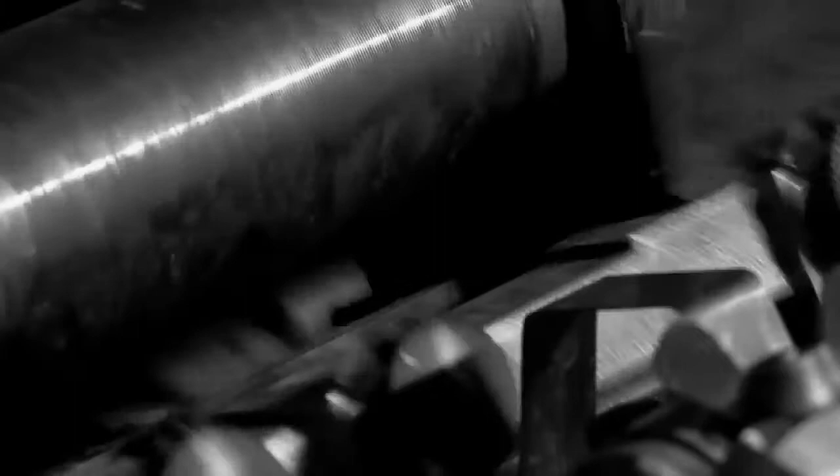Metalwork originated over 50 years ago from a great intuition of Erminio Bonatti. Everything had to be mechanized while the economic development was in full progress.

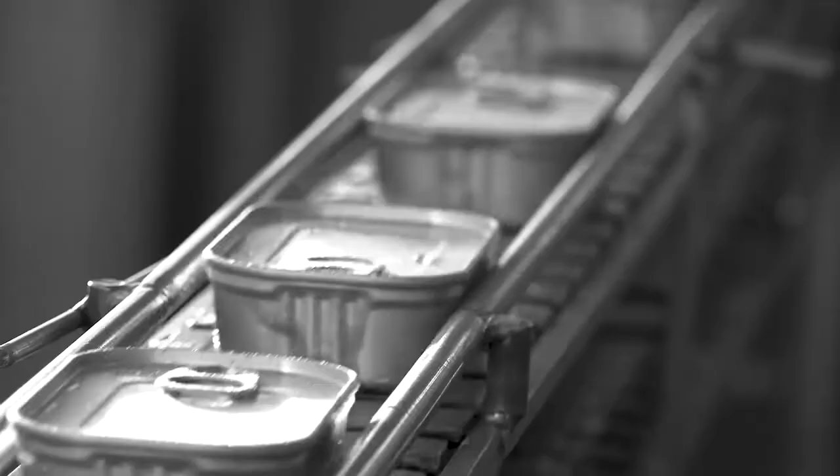From a little lathe and simple push-in fittings, Metalwork has become a leading company in the automation industry, counting a workforce of over 1,000 people, and is present in more than 40 countries across the world.

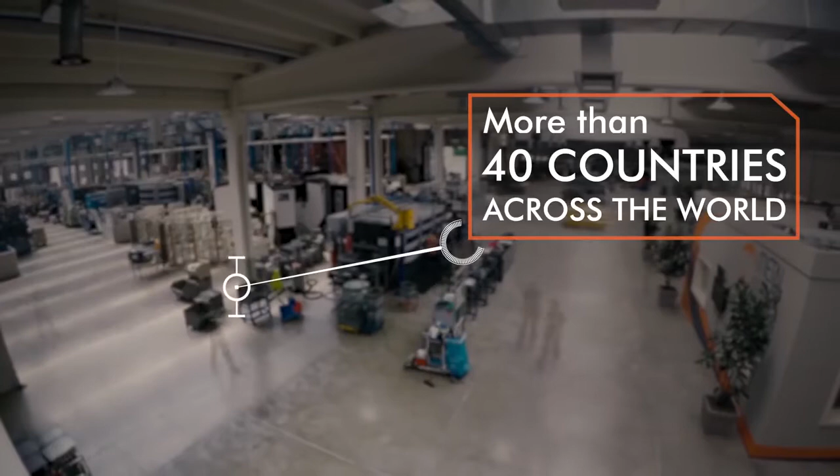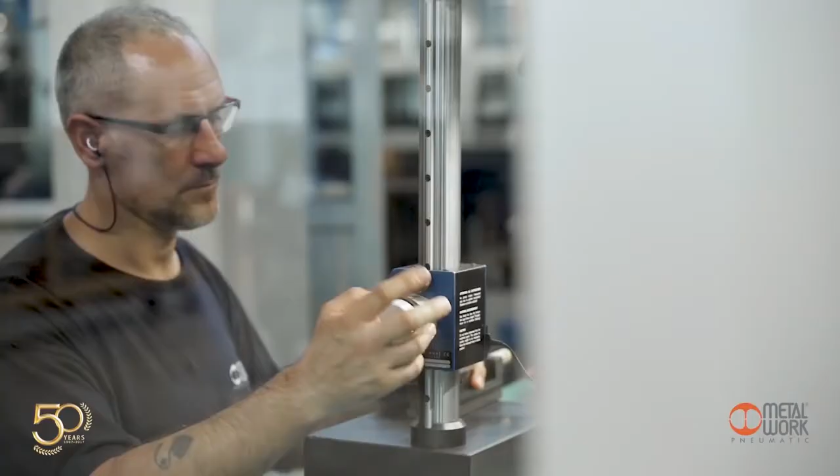One of the aspects that characterize the success of Metalwork is the Kaizen philosophy, which means changing for the better. It is based on the culture of continuous improvement, reducing waste and everything that does not represent an added value.

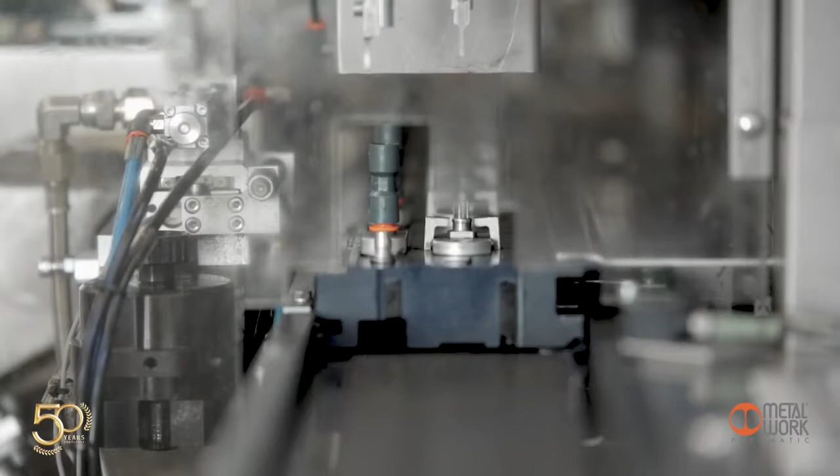In Metalwork, the Kaizen approach is used in all departments and all corporate activities, starting from the project to delivery of the finished product.

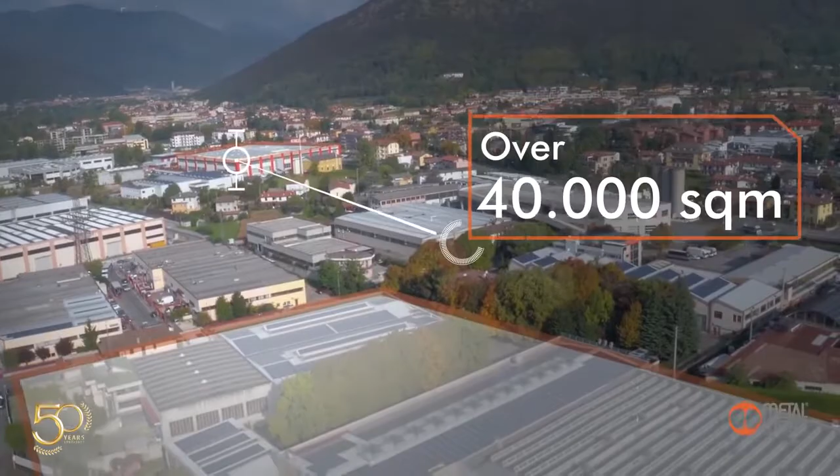The success of Metalwork lies in its numbers, an ever-growing turnover. Its subsidiary companies are spread all over the world. A production hub covering a surface area of over 40,000 square meters, where around 400 people work.

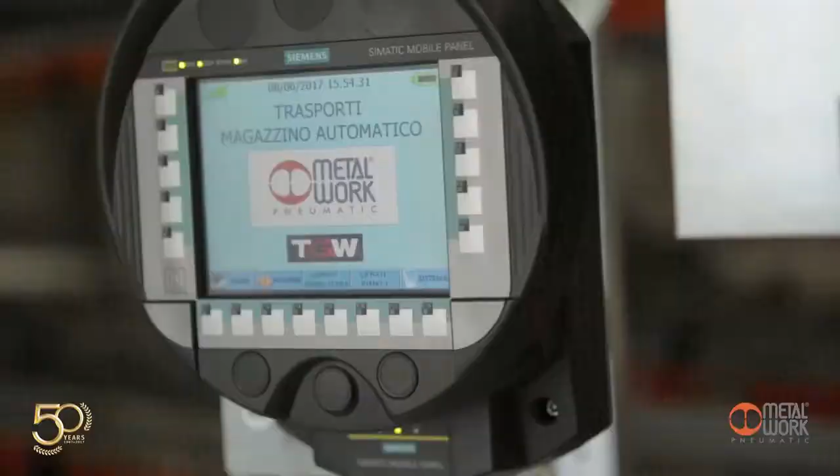A cutting-edge automated logistic hub working 24 hours a day, 7 days a week. All this enables us to fulfill an order within 24 hours for our nearest customers and 72 hours for those from far afield.

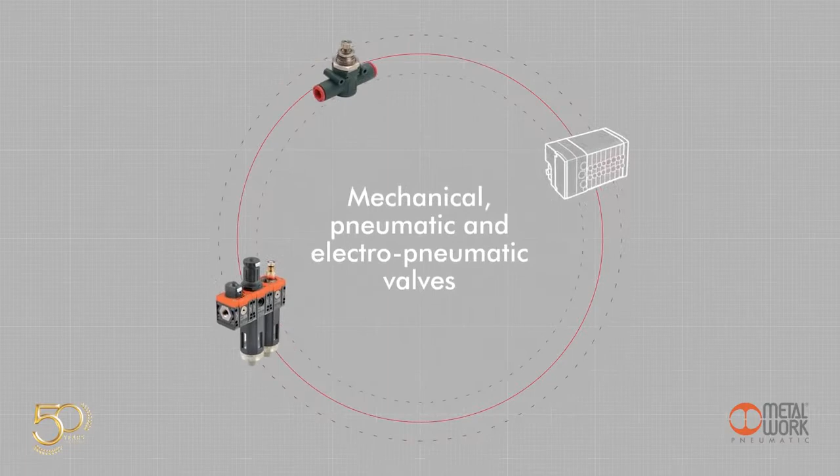Metalwork offers 4 product lines: air treatment units, fittings and plant accessories, mechanical, pneumatic and electro-pneumatic valves, and pneumatic and electric actuators. Now let's see how the Metalwork machine operates.

Metalwork products are created in the industrialization, product research and development departments, which work hand in hand to integrate key competencies and skills. The proximity of these two departments has the scope of reducing time to market.

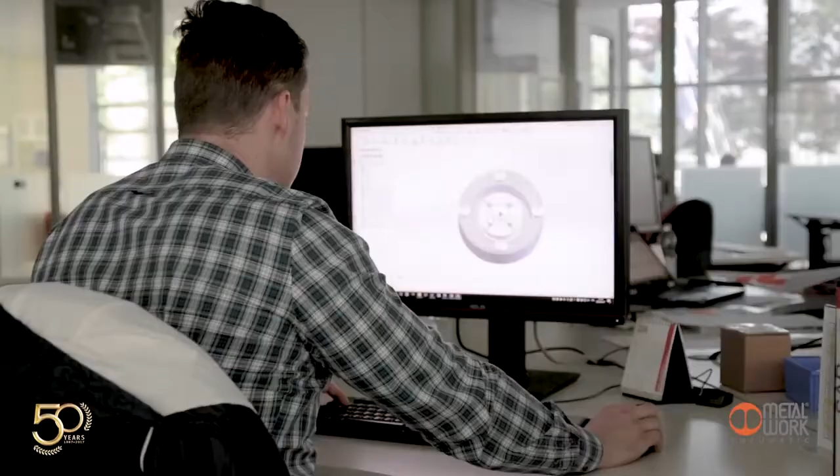From the moment the product is designed to its launching on the market, the departments perform continuous tests, carefully monitoring work in progress and any possible critical issues.

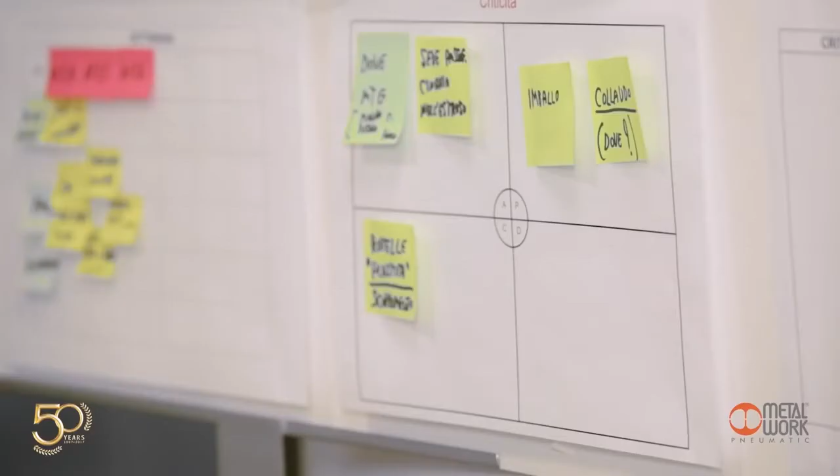The method used is the visual management of activities, typical of the Kaizen philosophy. Another fundamental instrument for visual management is the Deming cycle, an iterative method in 4 stages to monitor and improve processes and products.

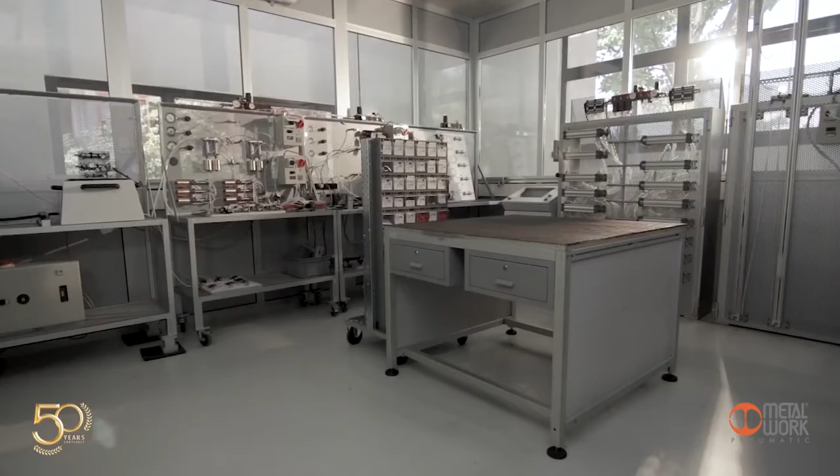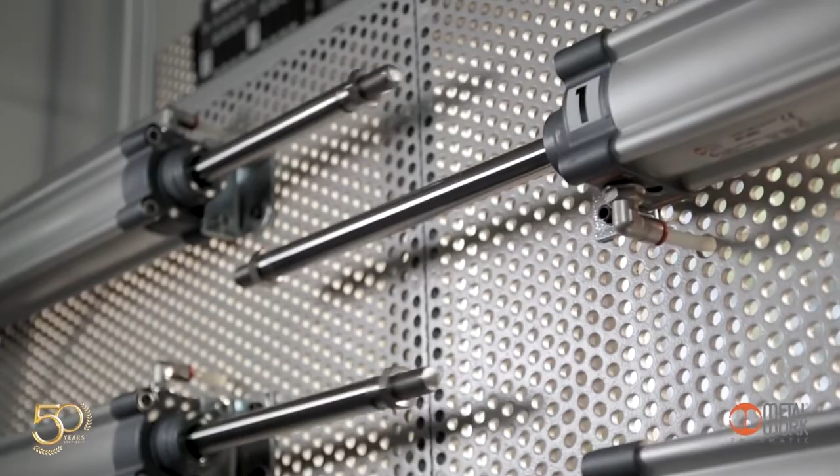After designing the product, we move on to the testing stage. In this department, all new products undergo a continuous cycle of heavy workloads. Any issues are immediately notified to the design and development departments to perform the required fine-tuning operations.

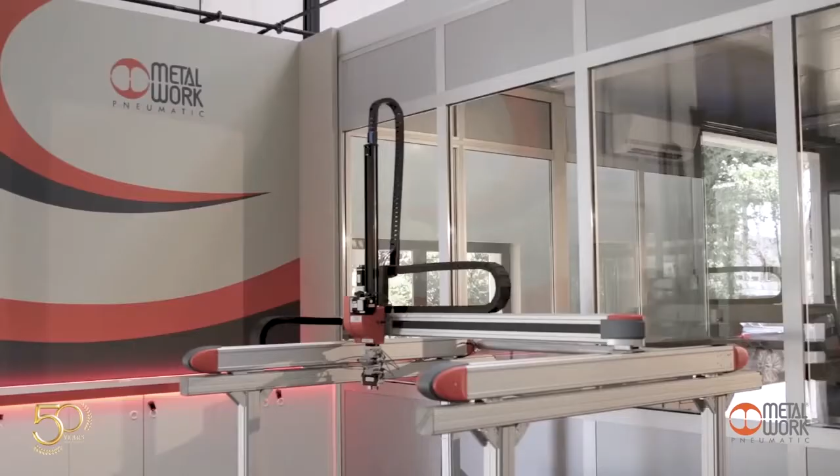Monitoring is an essential part of the Metalwork production, and not only during the initial stage of product development. Other tests are performed during the production stages when any issues are brought to the attention of those in charge of the product. The intermediate check during production enables optimization of the working process.

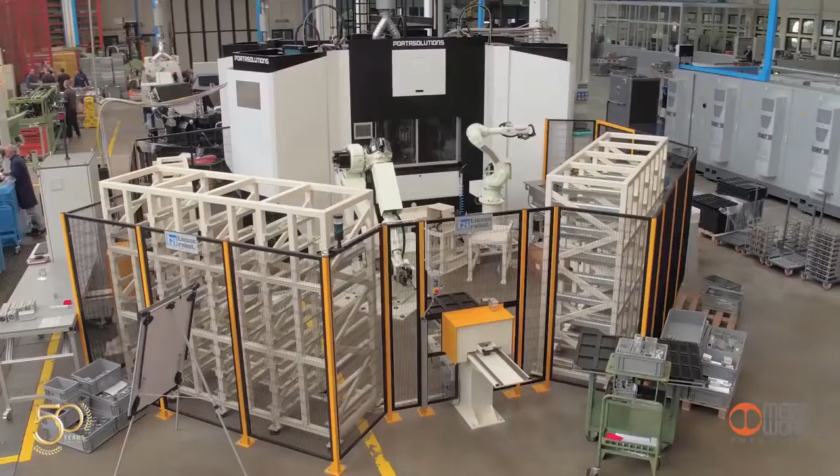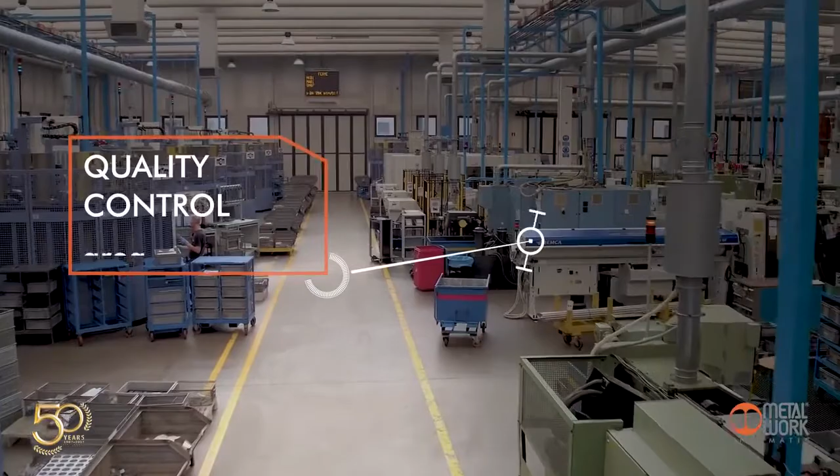Production is subdivided into 3 areas: the tools and equipment preparation area, the machine operational area, and the quality control area. Nothing is left to chance. Everything is standardized. The continuous improvement process is clearly visible at this stage.

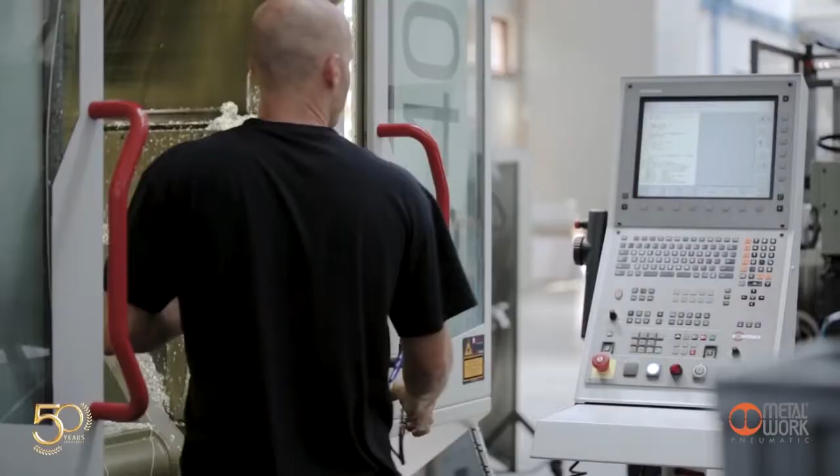Most equipment used for production is made internally. This allows us to save a significant amount of time and to ensure that the results meet production requirements.

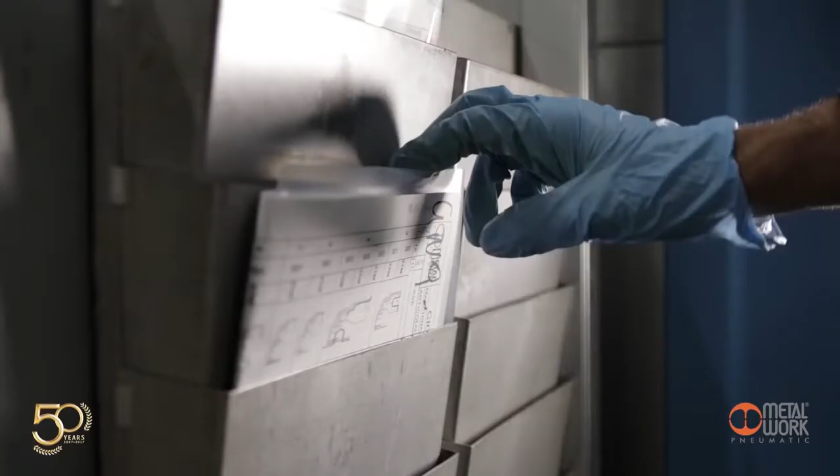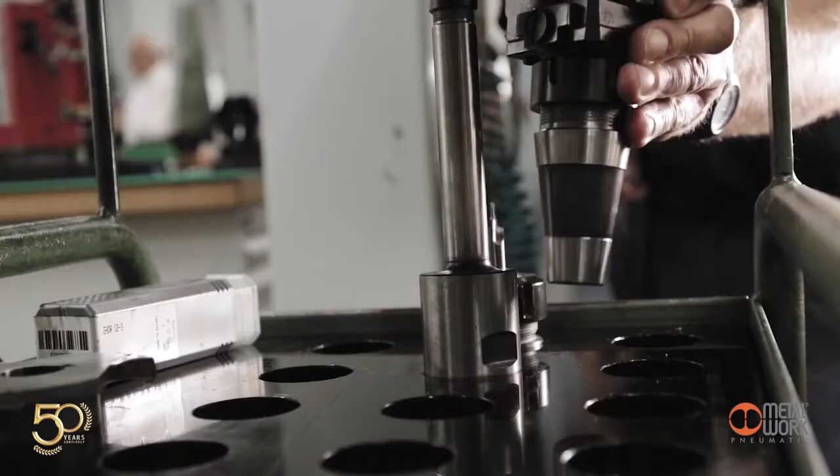A department is specifically dedicated to machine setup. This is where the tools and elements for each production program are set up. Each tool is thoroughly checked, calibrated and positioned on a cart in order to be collected by a tool technician to be assembled on the machine.

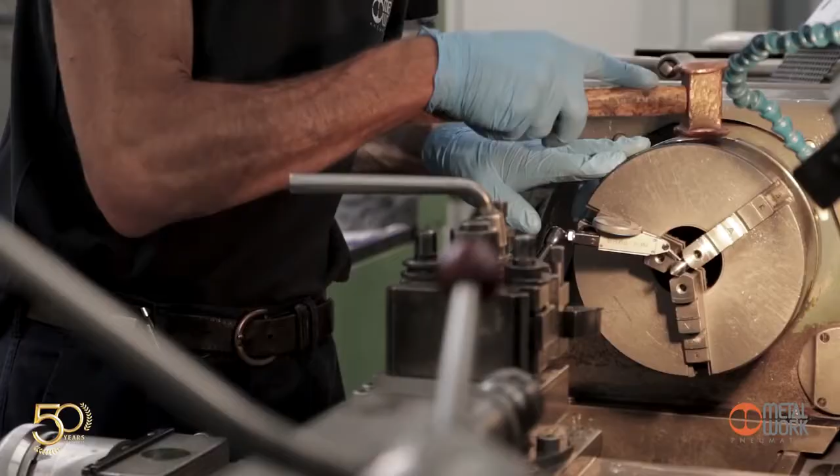Once preparation has been completed, the tool technician collects the cart containing the tools, which are then mounted on the machine. This activity enables reduction of setup times by 80% and enables the toolmaker to focus on the functioning of the machine and the quality of the result.

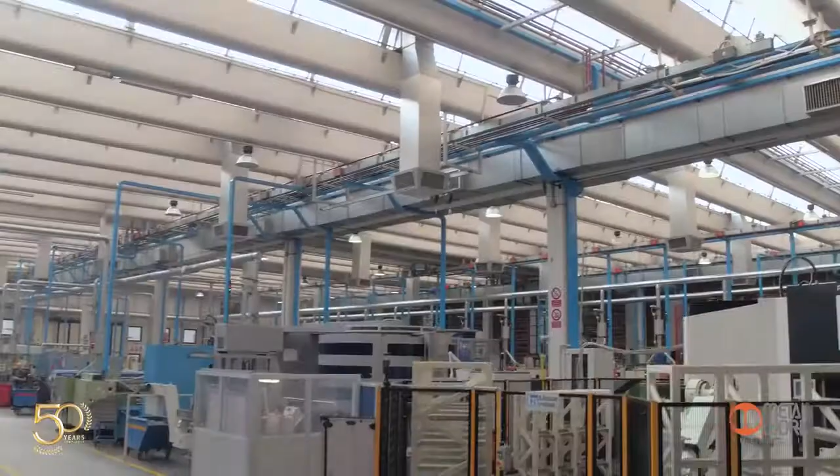The production department ensures continuous production 24 hours a day, 7 days a week, through 3 working shifts. Those in charge of the department monitor each stage together with their employees, in full respect of the agreed deadlines and applicable qualitative standards.

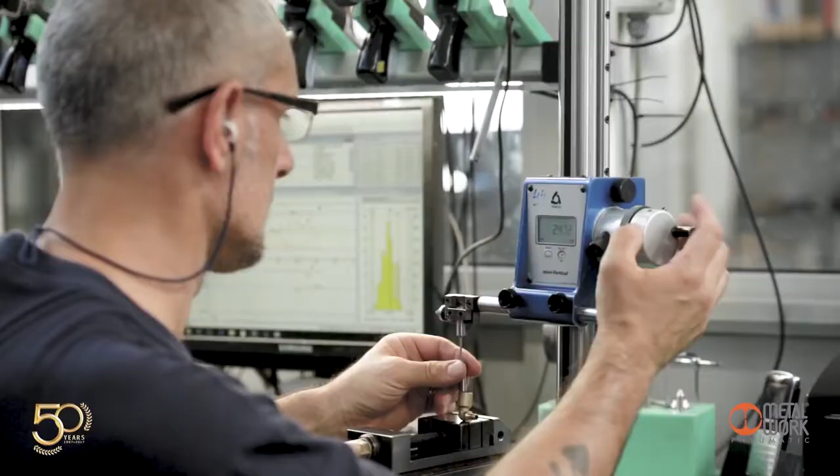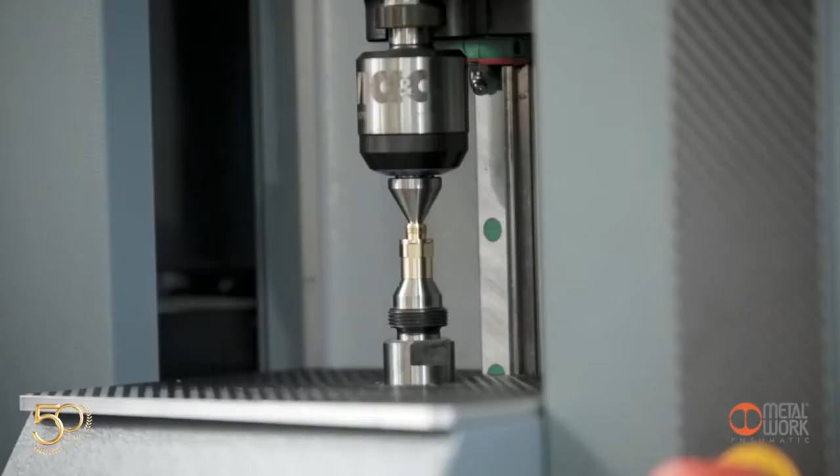The last production stage is Statistical Process Control, SPC. Quality control is performed through a sample optical and numerical system in the metalworking machinery department. If any values exceed the tolerance range, production is interrupted to avoid faulty parts.

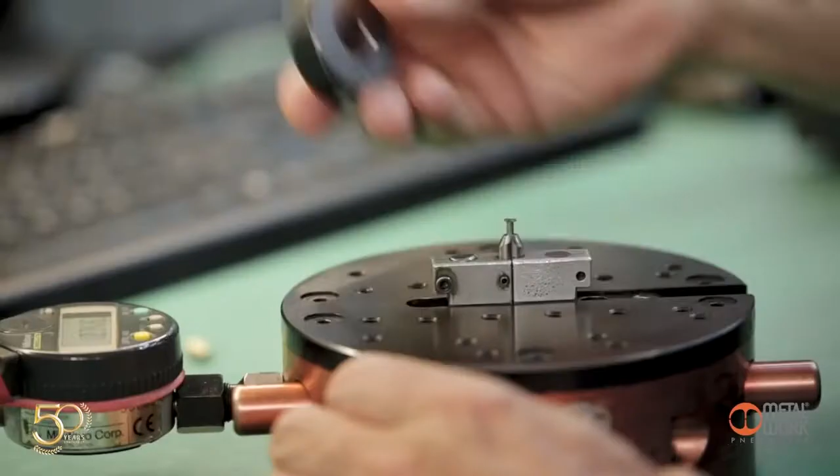This is the total quality concept, typical of the Kaizen philosophy, which sets out that a faulty component should never reach the end of production to then be reprocessed.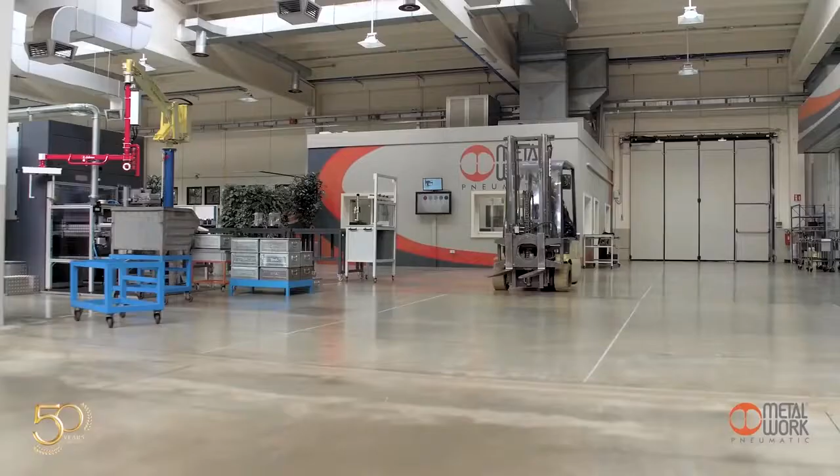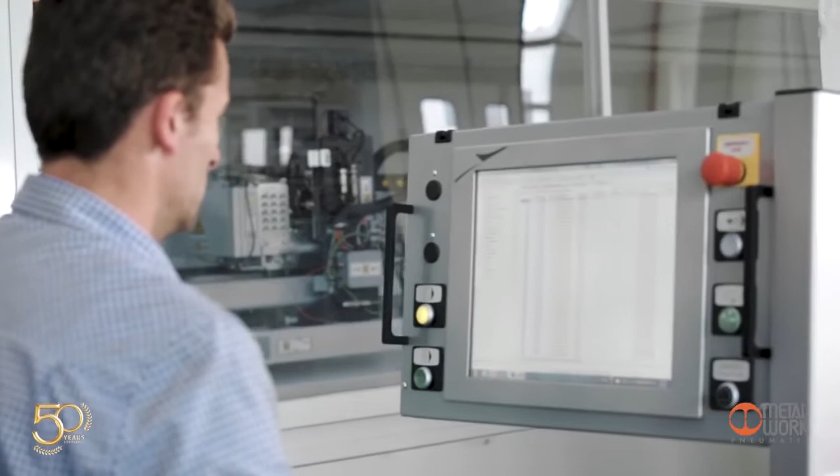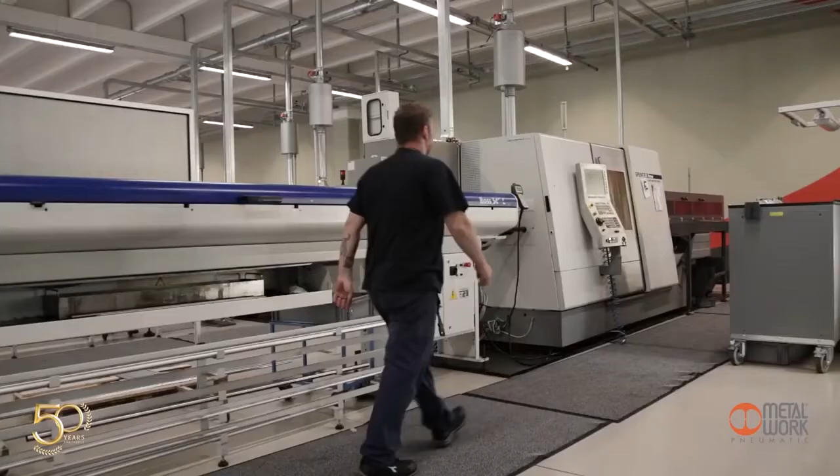The production of cylinders follows a different procedure. The cylinders are available in various sizes and types according to the customer's needs and are made just in time, even for a single piece. The customer's order is inserted by midday and fulfilled within 24 hours.

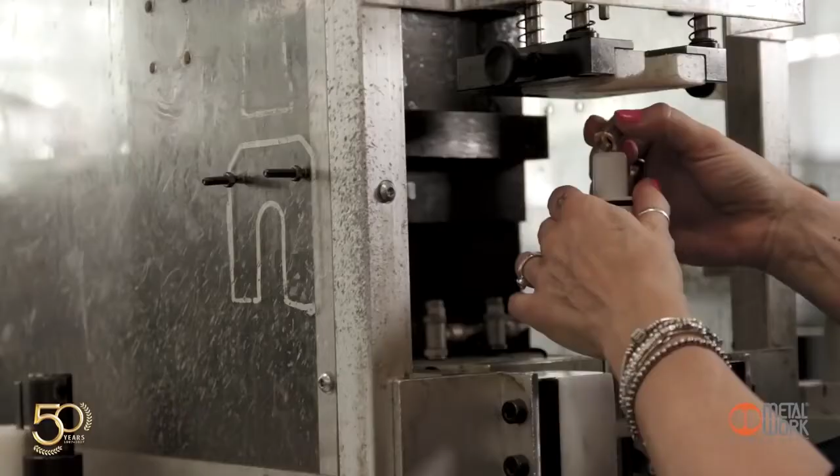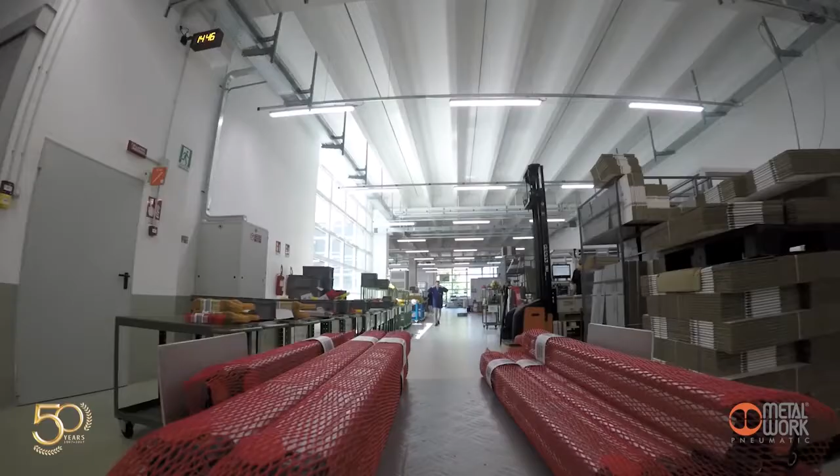First, the barrel is prepared and then the rod according to the size requested. Then the other components are assembled. Once the cylinders have been tested, they are packaged and dispatched, and in only 3 days they reach any customer in Europe.

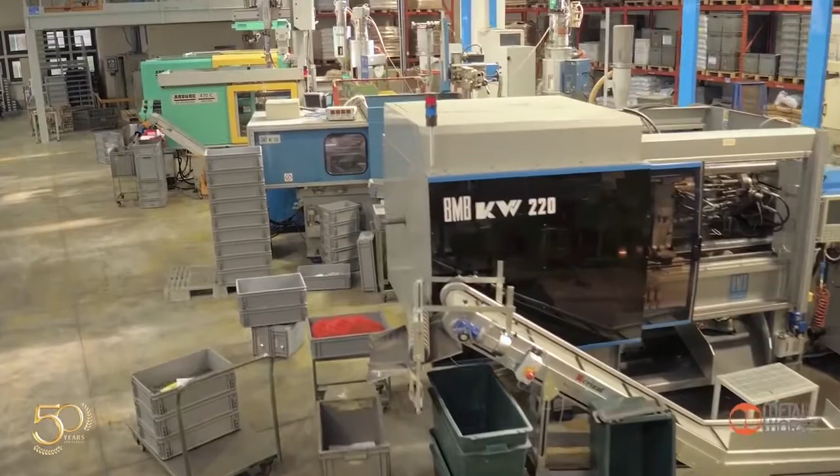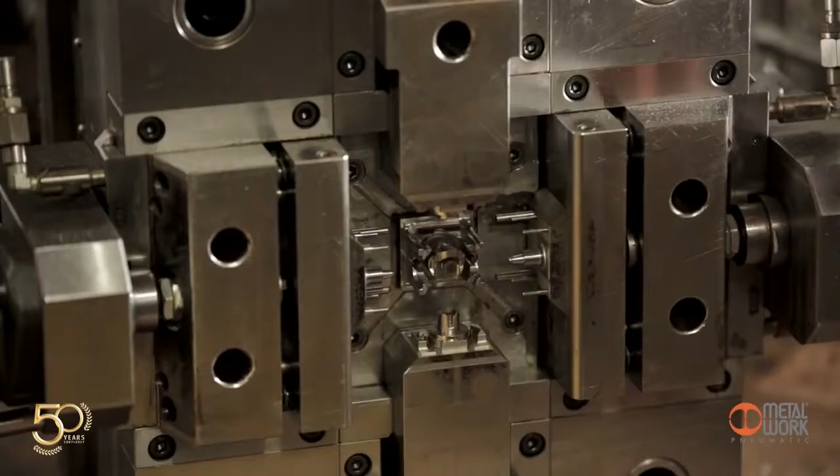Even the production of technopolymer components is internal. This permits us to deliver to the customer a finished product entirely made and checked by Metalwork. The first essential step is the design of each mould, which is conceived internally and then made by selected partners who ensure a very high qualitative standard.

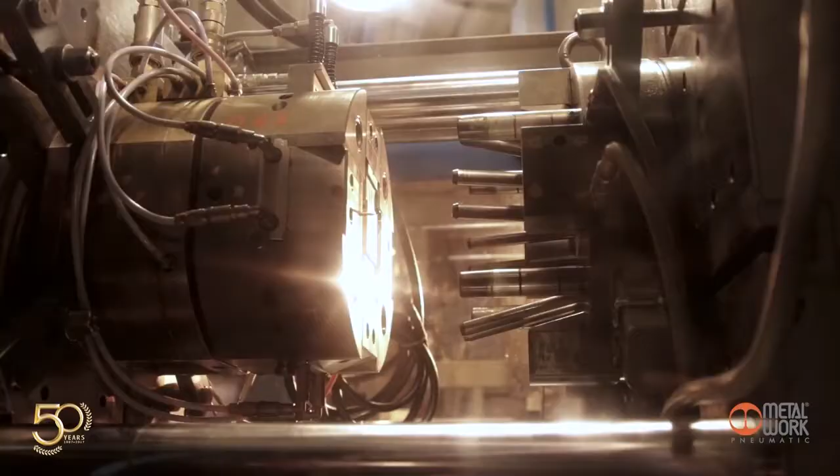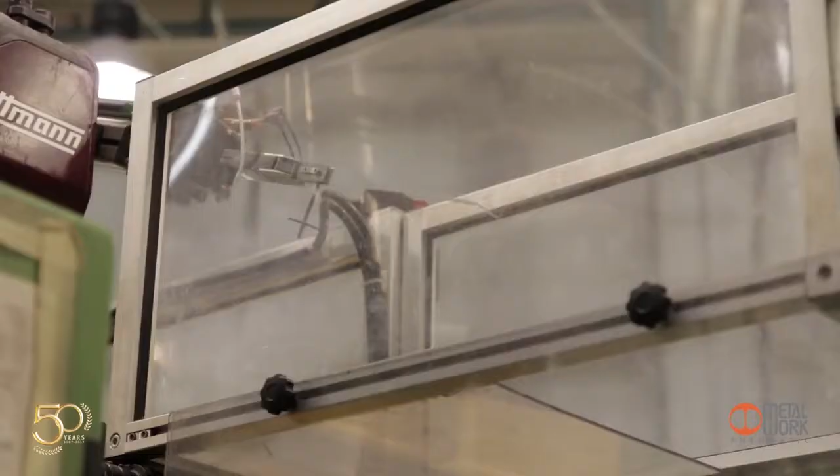The technology used is highly innovative. If you take a close look at each single piece, you will notice its geometrical complexity. It would be very difficult to obtain the same result with metal. In this case, quality control is purely visual.

The assembly area, the final testing of all products, the mechanized logistics center and shipments area are located in the new plant inaugurated in 2016, a great source of pride for Metalwork. This building is a true jewel.

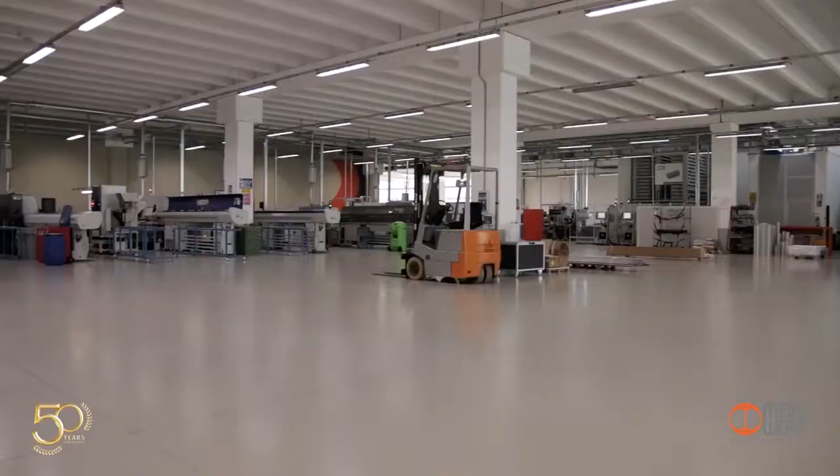Its surface area of 25,000 square meters and innovative design concept comply with high efficiency and livability standards. Spaces, light, air conditioning, everything has been designed to offer an ideal workspace, dedicating special attention to optimization of energy consumption. Its 8,000 square meter roof is covered in solar panels, which on really sunny days meet most of the energy requirements. Two geothermal wells pull water at approximately 13 to 14 degrees Celsius for heating and cooling the underfloor heating.

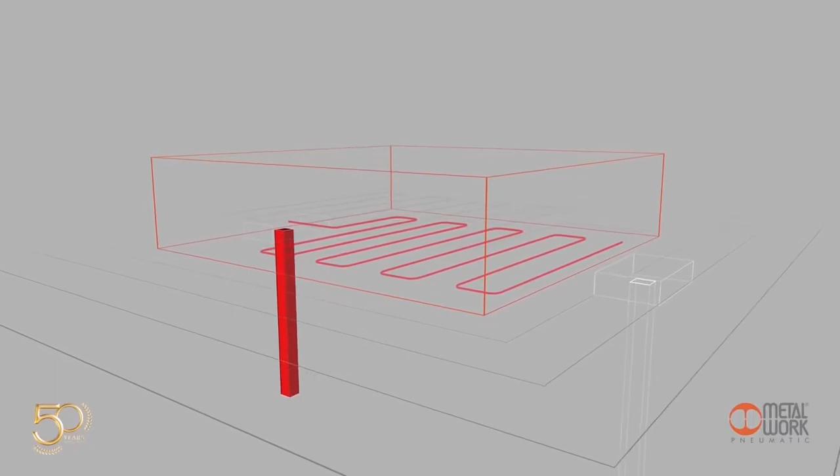Internal illumination is entirely LED. And during project development, great attention was dedicated to solar exposure.

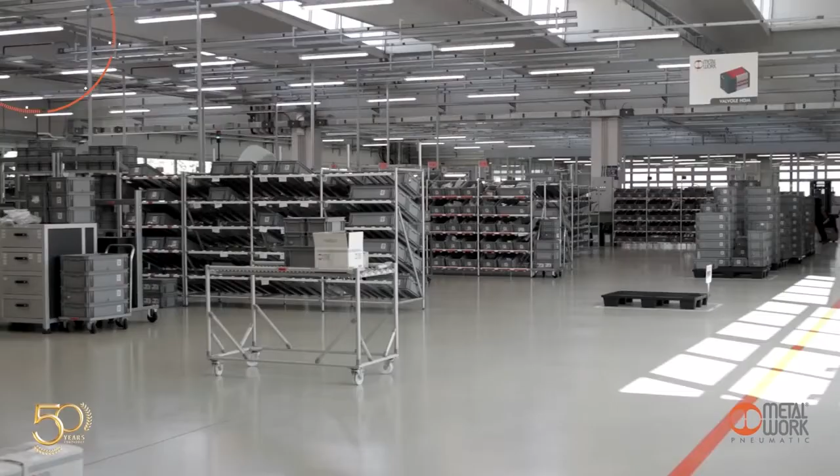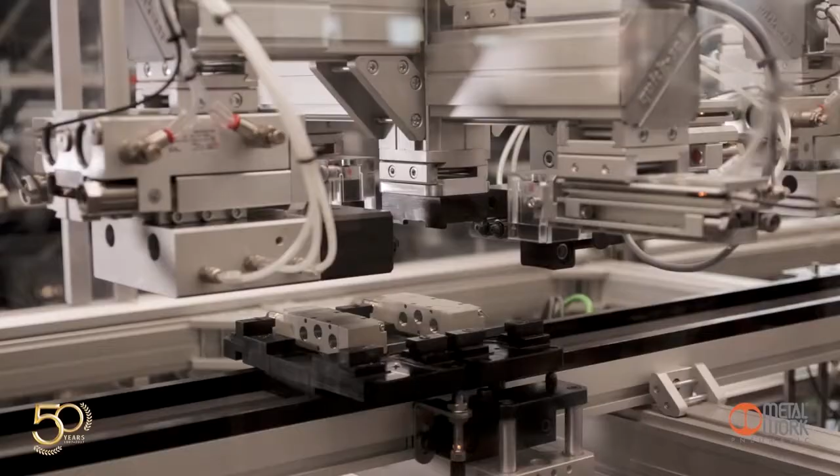This area is organized in several departments, and each of them operates in synergy with the management system. Everything has been designed in compliance with lean production: no waste and maximum efficiency.

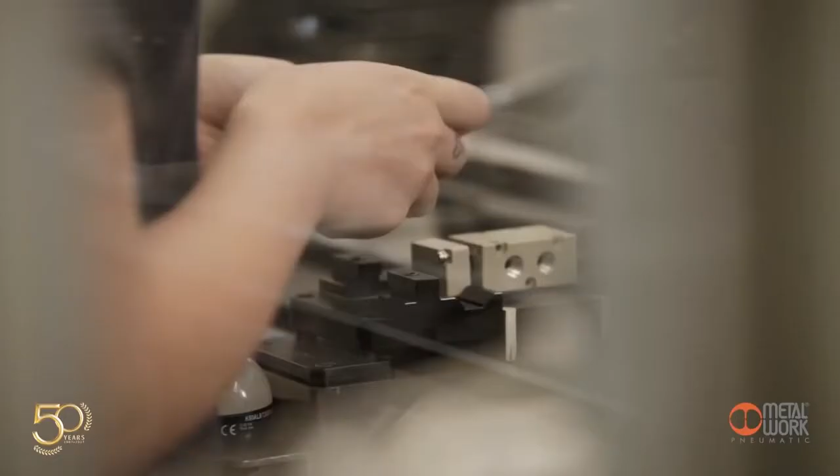Metalwork produces only on the basis of orders received from its customers. No storage is envisaged. Each piece lying idle in the warehouse is a cost that must be reduced. Fittings are the only stocked products.

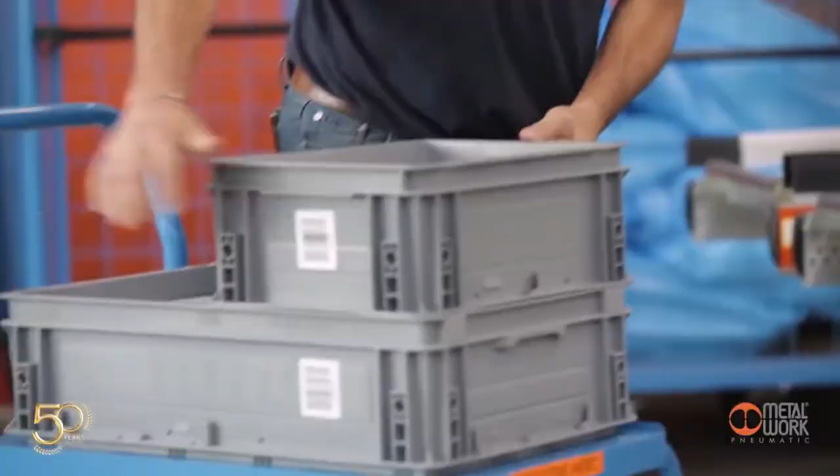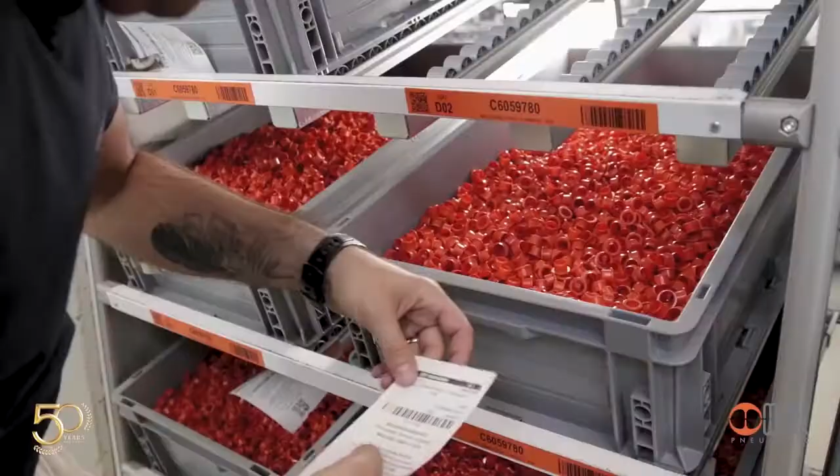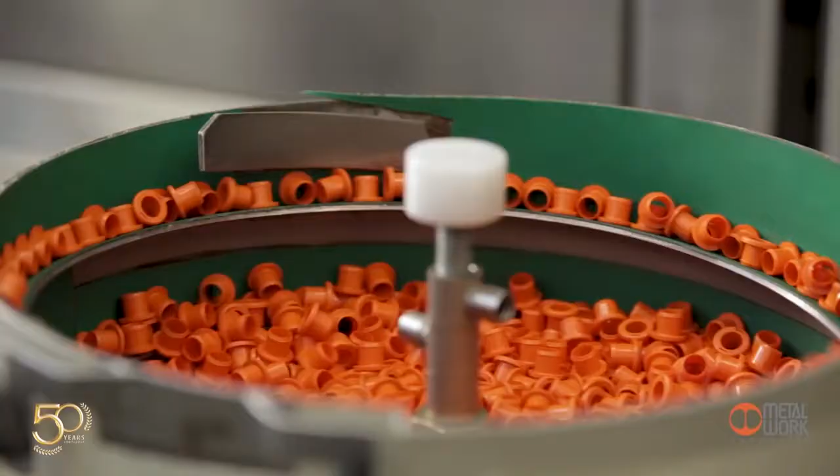Production quantities and replenishment of stocks are managed through a direct system called Kanban, which is also part of the Kaizen method. Each label corresponds to a supply order. As the labels are removed, the minimum stock signal gets closer. At this point, stocks are replenished, with the necessary quantity established by the management system.

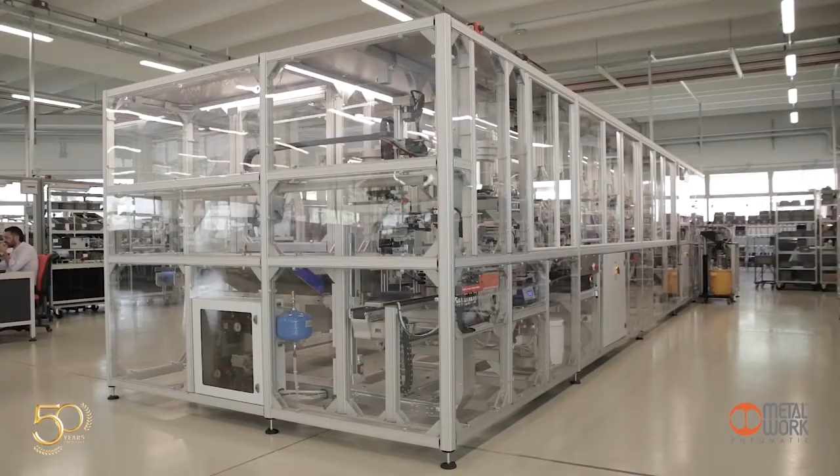Here the activity is mainly automated, ensuring high production in a short time frame. The other departments are also automated. This machine, for instance, is dedicated to the assembly of valves Series 70. It can manage the entire cycle on its own, including the test and packaging, producing 170 valves per hour.

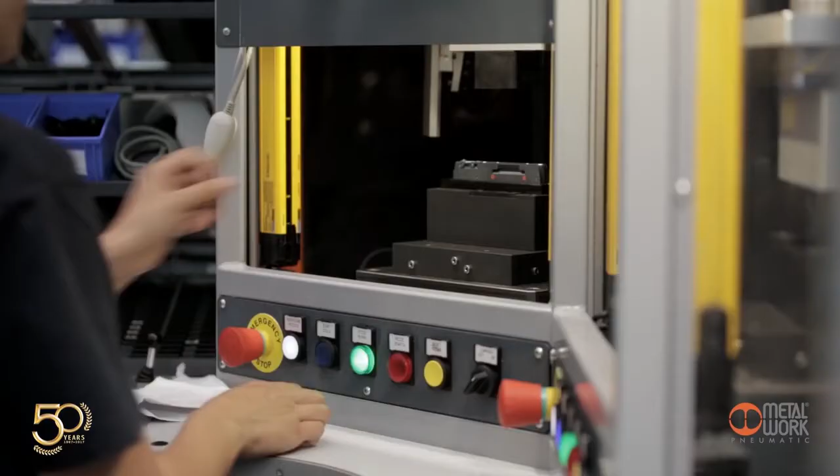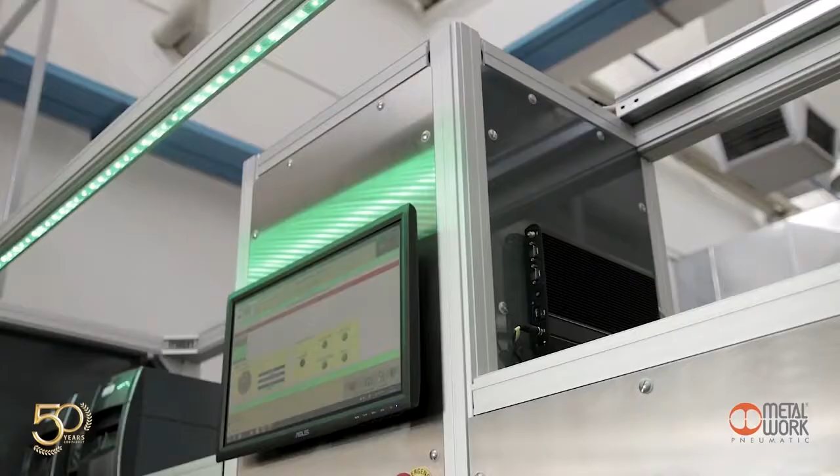On other production lines, assembly is usually performed manually by specialized technicians. Some products are assembled on the basis of the setup requested by the customer, e.g. EB80. Each island is different from the others. Here also, a monitoring system regulates everything to reduce the chances of error drastically. After assembly, the product undergoes a final test before packaging and shipment.

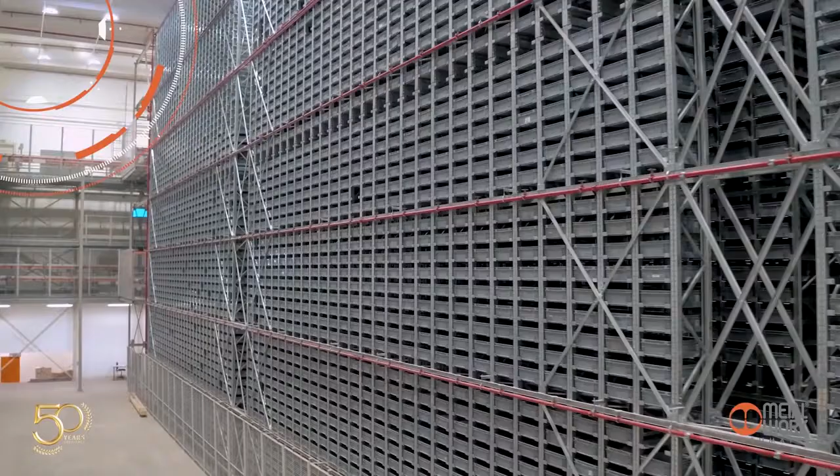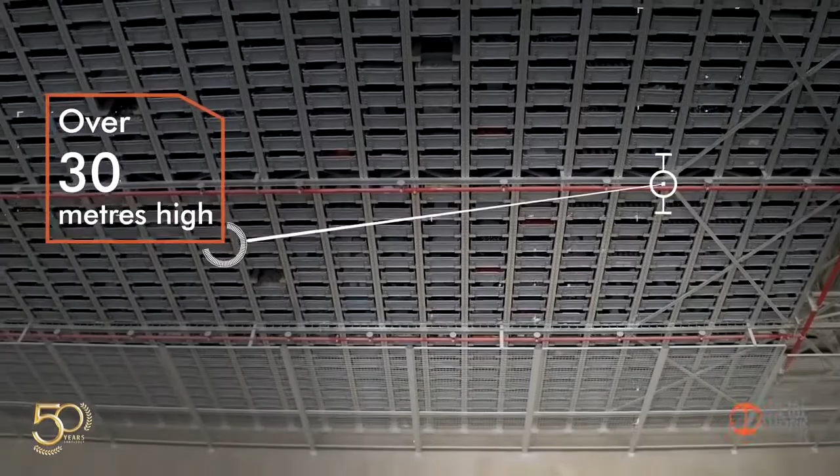The heart of the new plant and logistics is the super technological automated system at the center of the building. It is over 30 meters high. It hosts more than 26,000 drawers and is active 24 hours a day, 7 days a week. It is the hub of all goods handling.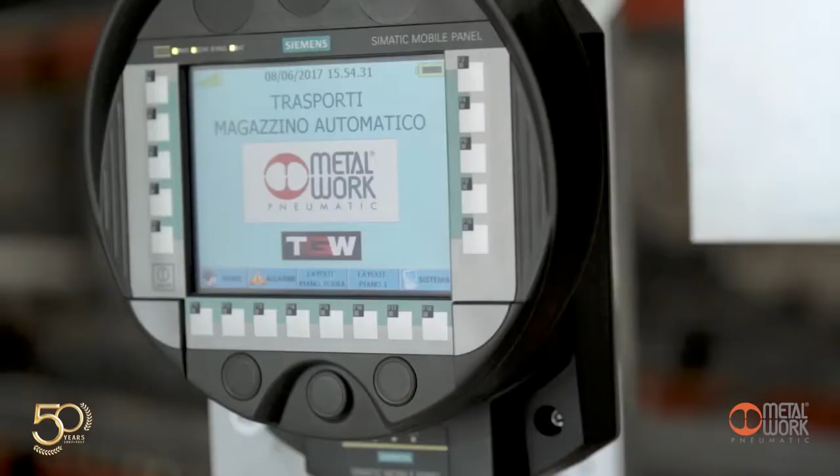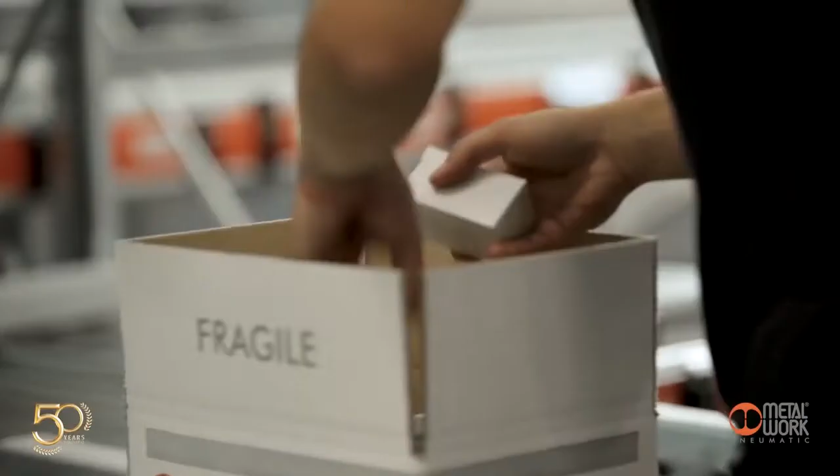Here, both purchased and pre-assembled production components are stocked in order to route them to the various departments. This is also where all finished products ready for shipment transit. Fulfilling orders in the agreed time is one of the strengths of Metal Work. The advanced logistics system enables us to insert an order and fulfill it within 24 hours.

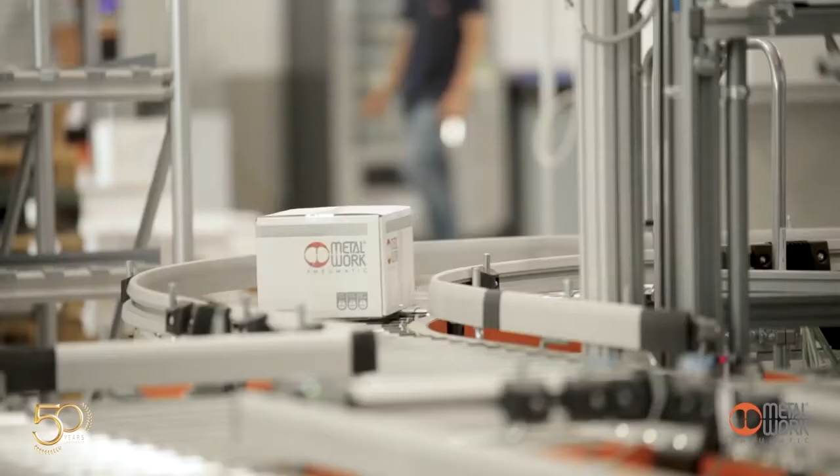Once packaged, the product is labeled so that it can be recognized by the system and routed to its destination. All shipments to the Italian and international Metal Work subsidiaries and clients leave from here.

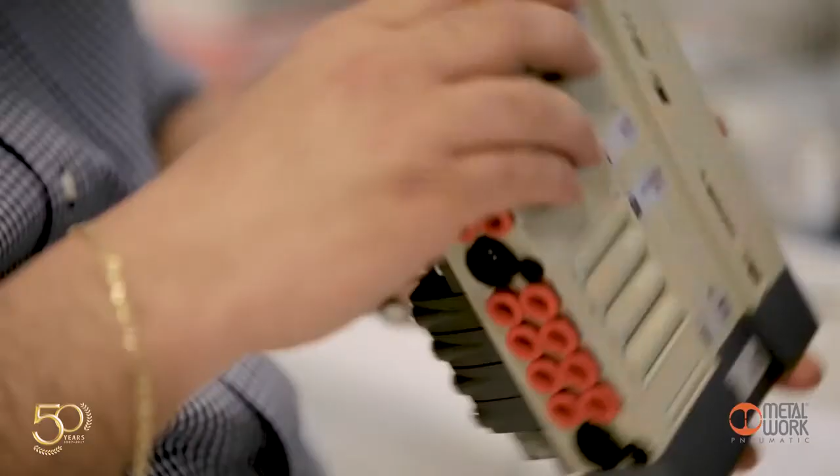Metal Work sets an example of the success of Italian entrepreneurship around the world with a bright future. Its continuity and development are in good hands. Thanks to the Operation of Trust launched by Erminio Bonatti, the management and enhancement of the company in years to come are ensured by a team of managers who have complied with the most strategic aspects of the company for years. Because history goes on, and the last 50 years of ideas, innovation and challenges are only the beginning.